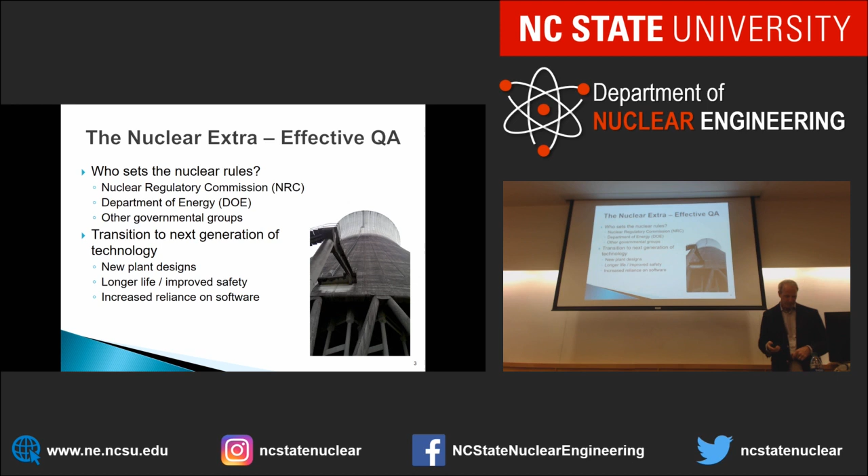So what's required in quality assurance? Facilities that are regulated by the NRC, we got about 96 right now. I think last time I checked, there were a little over 100 a few years ago. About 20% of the electricity in the U.S. comes from nuclear power. That varies depending on where you're at in the world. You go to France, more like 80%. Other countries, very little. But we're about 20%, so we have a mix.

With that, 31 research and test reactors, including right here at NC State. You'll see that there's other activities, though, that the NRC regulates besides the big ones, which are the power plants and research and test reactors. They do a lot of work in the fuel transportation area, spent fuel, new fuel, that type of thing. They also work in areas like sources for things like radiography, different types of manufacturing type areas. And then there's a large component that goes into medical devices, if it's a nuclear type of medical device, brachytherapy type sources, things like that. Sometimes that's a shared responsibility with a state, so a lot of the states do the health type work.

The area I worked in when I was at the NRC, I worked on the new plant area, and we handled the supply chain aspects for the new plants and the new plant licensing primarily. So that's the area I know most about, because that's just where I worked there. There's also new plants coming on board. We have 2 new plants in Georgia. The Vogtle plants are coming on board. They're in the middle of construction right now, about 80% complete. They're down close to Augusta, Georgia.

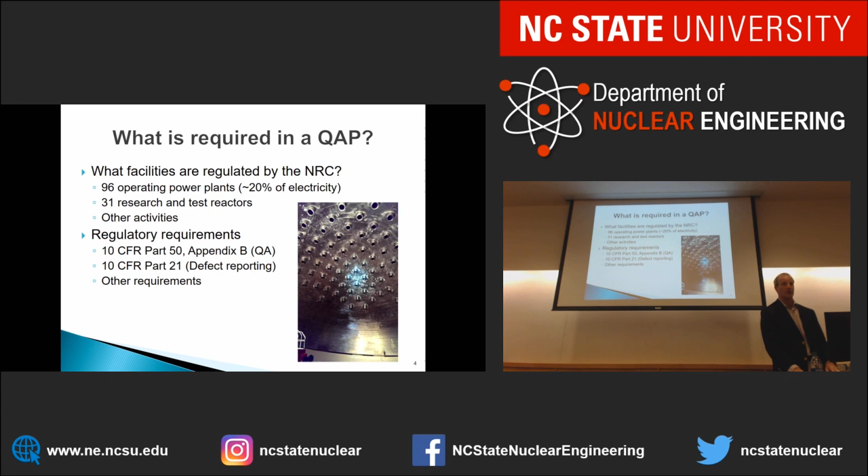So these would be the 18 criteria that make up the nuclear extra, or you might call it the 18 criteria that are printed on this page in regulatory language, or what we call requirements in ASME NQA-1, the basic requirements. This is the 2017 version; the latest one's been published. They do one about every 2 years. This particular version has the basic requirements of these 18. It's probably that little part in the front, very little as far as the written.

And then there's more requirements that say, hey, if you're doing certain things, these are the things you should do. That's a little bigger part. And then all the stuff in the back is guidance, like these are things you could do. There might be good practices, the best way to do it, that kind of thing. So this has a little more information in it. But the 18 criteria are the same. They matched them up to make it easy.

And to give you an idea of some of the things that go into this nuclear extra, that might make a company that does nuclear work different than a company that just does work for the medical industry or general type work for you as a customer. Organization. We have a very structured organization. One of the big themes within that is independence. If one person does work, we have another person that's independent do checking of that work. That's a common theme.

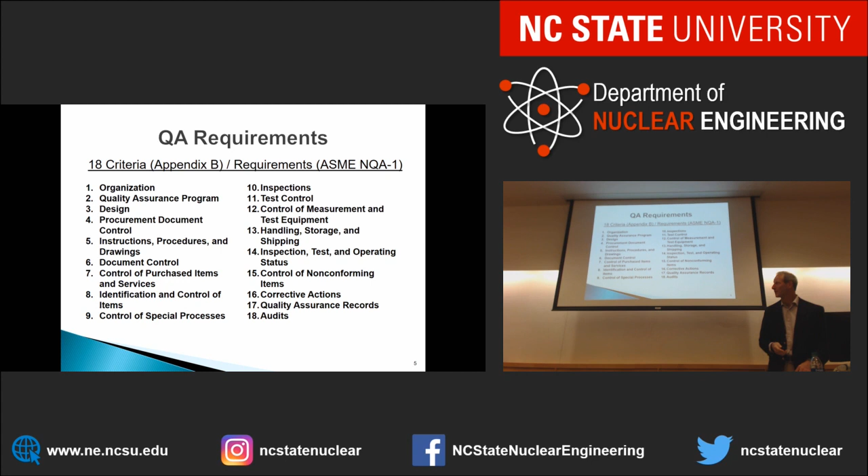Just out of curiosity, has anybody seen these before? A couple people? People who worked in quality assurance probably know it, or do audits. They know that because they have to know what it specifically says.

Let's talk about a couple regulatory concepts. The first one I want to talk about is this top line, basic components are safety related. If you ever heard of something being most critical in a nuclear plant, it's called safety related. The technical term might be it's a basic component, it's a pump, it's a valve that is very critical to the operation of our plant.

Well, most people in a plant probably couldn't tell you how it became safety related. They just know it is safety related. A pump or a valve or a system has been designated as safety related. Well, this is why it's safety related in a nuclear plant, because it's related to one of these three things.

One, it's something to do with the integrity of the reactor coolant pressure boundary. So in a plant, you're circulating coolant, and there's a pressure boundary that typically goes with that. So the integrity of that boundary, so we're not spilling that coolant. That's the first one. Second one is we want to be able to shut down the plant and maintain it in a safe shutdown situation.

That's the second one. And then the third one is, in certain cases, you might have accidents or other events that might cause you to release something into the atmosphere, to the ground, or that might affect your local populace or your employees. So we want to prevent that off-site exposure. So the people at the high-level design have to be really aware of this, because they designate systems as being most critical, safety related, because of these three areas.

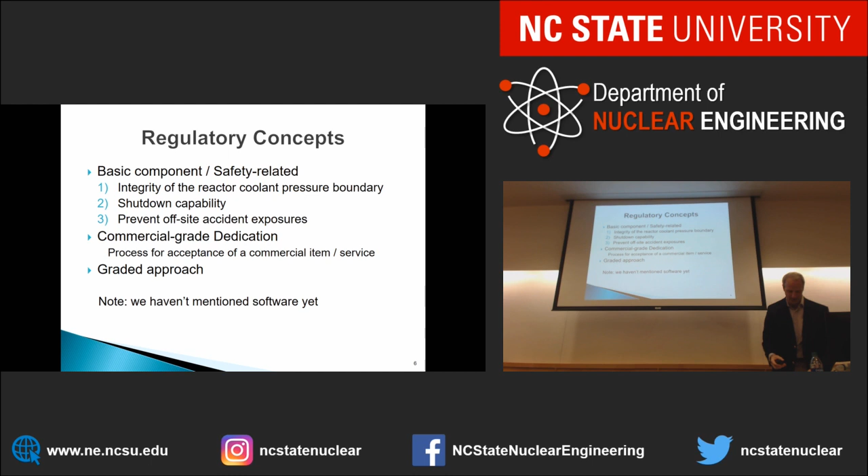Okay, so to bring this all together, there's a flow down of quality assurance requirements. We start from the government, it goes to a licensee. So a licensee might be a nuclear power plant. It might be NC State because you have a test reactor. And then it even goes to supply chain because you've got to buy your pieces or services from there. So we talked about how Appendix B from the quality requirements gives the 18 criteria.

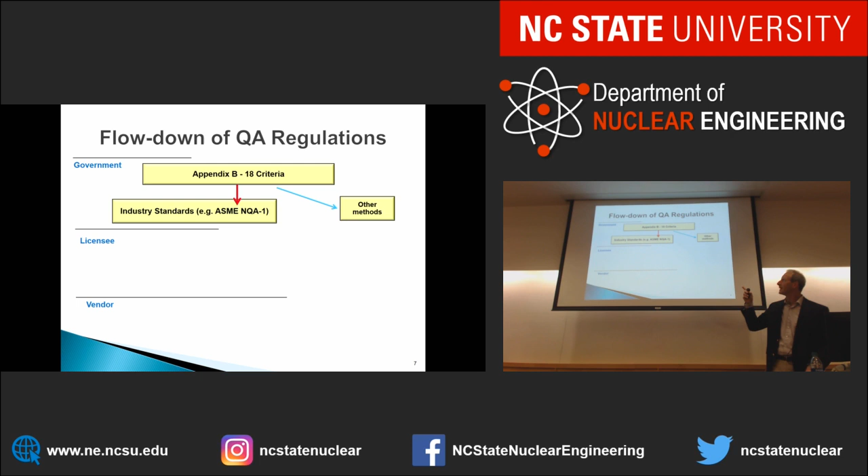Typically, you go through an industry standard like this, and you say to your licensee, via their license, which is part of the NRC licensed activity, and I think there are actually some NRC folks here today talking about licensing. So that license exists with those organizations that are allowed to operate within the nuclear industry from the NRC. Part of that's the quality assurance program, the QAP. And that licensee is going to do that grading and manage the quality program, and will determine what's safety related based on how they operate and what's not.

Some things might be just purely commercial, non-safety, but then there's this one in the middle that's augmented quality. You might hear that term. That's something that has additional quality requirements, maybe like Three Mile Island requirements or something else that's really important, but it's not safety related, because safety related is those 3 things. So the licensee then wants to buy things from the supply chain, and they would issue a purchase order, the red line over there to the left, and the quality assurance requirements would be put down to the vendor, who has another quality assurance program that meets nuclear requirements, and they can buy things directly from the vendor fairly easily once the vendor has the nuclear quality assurance program.

If they don't, then you've got to do something called dedication, and there's 4 methods for doing that, which I really won't go into, but you can get things that were commercial and deem them equivalent to nuclear produced things by using dedication. Or if it's maybe not safety related, you just do other things, and there might be other requirements that go with it. But that's kind of how it flows down into the industry.

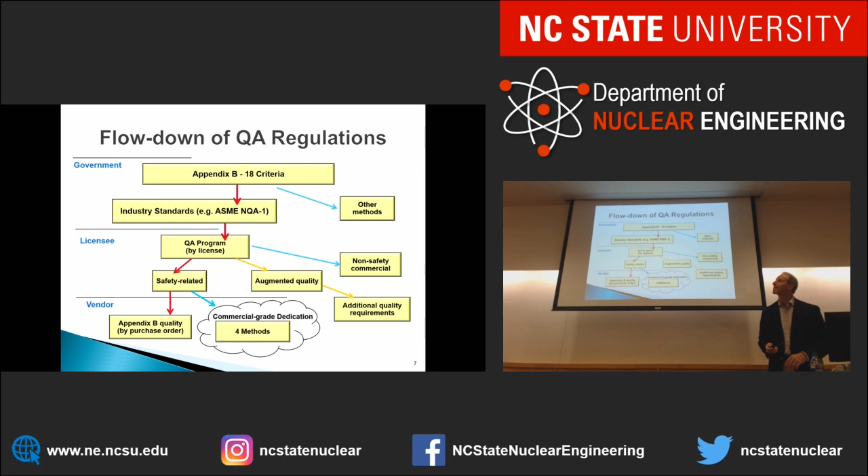So now let's take a step back and talk about computer programs or software and how we apply these requirements to software. Well, from a regulator standpoint, the regulatory concern is, does it affect the safety of your plant, which is those 3 things we talked about? Or is it part of your license that you said you've got to do something? So, for instance, let's say you're operating a nuclear plant and you have a valve, and a valve is a big chunk of metal, and you can open it and close it, and maybe there's a controller that does that. Well, the whole valve, even though it's part of a safety-related system, may not be safety-related.

For instance, maybe the valve just has to hold the pressure and not leak the fluid that's in it. Well, then maybe the pressure retaining part of it is safety-related. The fact that it opens and closes and the flow rates, or that it does it at a certain speed, may not be. It may be important, but it's not safety-related. So it's very important that you focus on what the part or the system or the component is, and how it affects safety. Usually the highest safety, from a software perspective, has to do with things that are embedded in safety systems. So if you have a sensor or a controller that has software embedded in it that makes it operate, and the operation is safety related, that's going to be the highest level of safety.

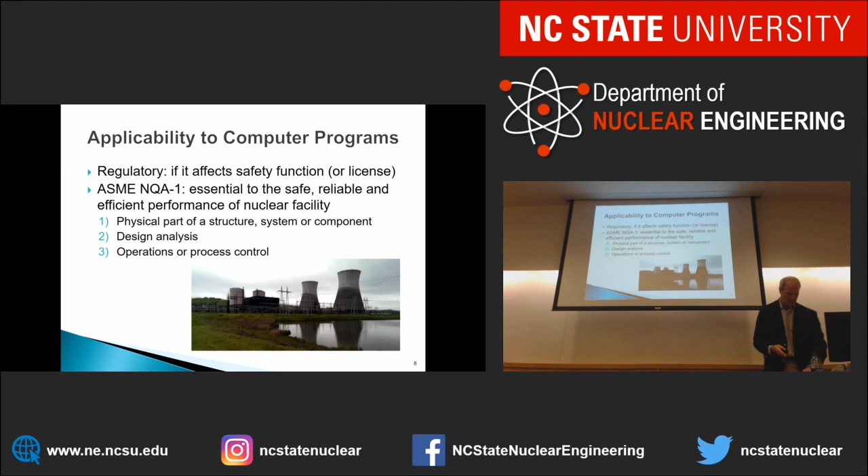Some software considerations. One thing is that software is a little different than a component. If you're a manufacturer, you're making something, and you're going to check it, you're going to test it, and you're going to ship it. If you're a software producer, you might do development, you're going to do some sort of testing, and you're going to send it out. There could be different ways that you send it out.

It's a little bit different because you've got more of a development side, and as we all know, software is usually not perfect when we get it, whereas components hopefully are as close to perfect as we can get them, especially in nuclear. So there is a little bit of a difference. NQA1 is more oriented to the components, but there are software elements that we're going to put in there.

And to get those elements, you really have to go to a certain subpart, that's what SP is, in NQA1 called subpart 2.7, and that gives you your software controls. It's probably about 20 pages long. So 20 pages tells you how you do software, whether that's developing software or using software. Could be either one.

It's not all inclusive though. NQA1 won't go into some areas like malicious intent, cybersecurity, those types of things. You're not going to find them in here. Important, you've got to do them, but they're just not in that standard. So it gives you a lot more information on how to do software, and that's where you would find it. Another area, if you were interested, dedication has another subpart, 2.14. Those would probably be the two areas that are more directly applied to software.

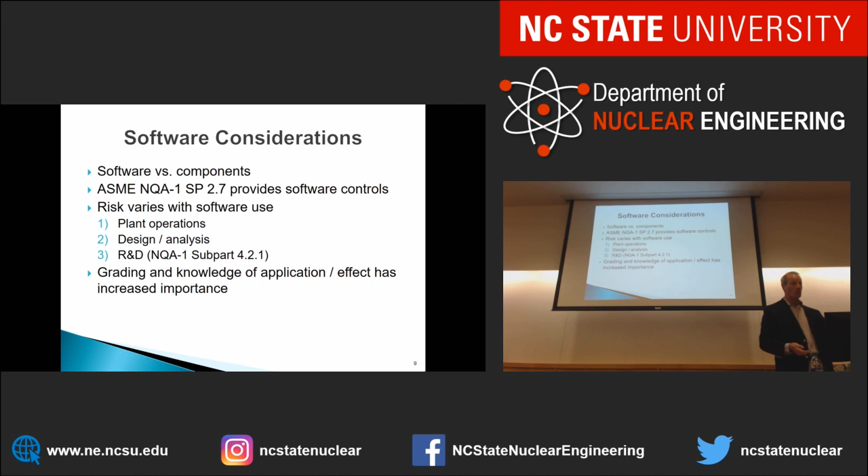So let's take a look at the worst case and give you an idea of how much rigor would have to go into your instrumentation and control system producer. Well, you have something called a life cycle, which is the software development cycle, how you go through, develop, test, that type of thing. There are life cycle documents that you would have to conform with. You've probably heard of IEEE standards. IEEE has a couple that would apply to the overall life cycle of developing software.

The NRC takes an industry standard like IEEE and puts their blessing on it through what's called a reg guide, or an RG. And they say this reg guide endorses the IEEE standard for software life cycle activities. And with that, there might be things you need to produce like a software management plan, a project management plan. So that's kind of the overall umbrella, but it gets a lot worse than that. Well, if you have a life cycle for I&C, you might have all these different phases you go through in your software.

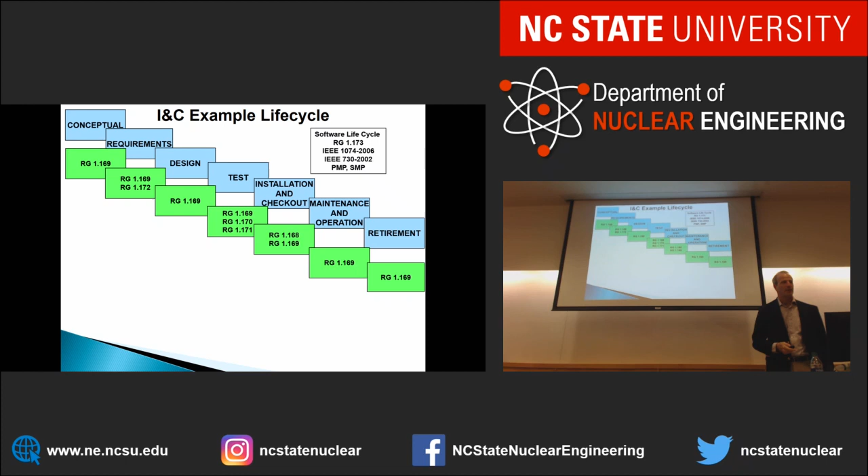From conceptual through design, through testing. You check it out, you retire it. So there's different phases potentially. And then there's reg guides for all those phases. And then there's IEEE standards for all those reg guides. And then there's documents that come out from everywhere, from requirement specifications, development, design documentation, verification plans, and reports on

down. So to give you an idea, if you're an I&C very high risk type of software, there's a lot that goes into it. And you probably have a very large dedicated staff to do this. So let's not talk about that because that's way too complex. Let's talk about a use example. And a use example would be something like maybe you do electrical sequencing in your plant from your emergency diesel generators. They come up when they come up, and you have to reload your system by making sure you don't overload your generator by sequencing on your various systems. So it might be something as simple as that.

So how would this work? Well, there's two areas that you would focus on. One would be the acquisition, how you get that software, and then what you do with the software once you get it. Those are the two main areas. Your software program, your quality assurance program is going to control all those software activities. Again, you're going to focus on what is the safety effect of this, and then you're going to decide you're going to buy this software because you're probably not going to produce it.

So you're going to buy it, and you're going to buy it from either a single source or multiple sources, and you'll have to figure out if that software is going to work with other types of software. You're going to have to figure out how you're going to control that, and you might go through a dedication type of process with that. There'll be quite a coordinated effort that would go into the acquisition between your procurement people, your engineering staff, your quality assurance people, to make sure you're meeting your safety requirements when you're buying that, and the supplier can supply what you want, and it will properly function for you. So that's part of the acceptability: once you go buy it, you got to make sure it really can do what you want if it's important.

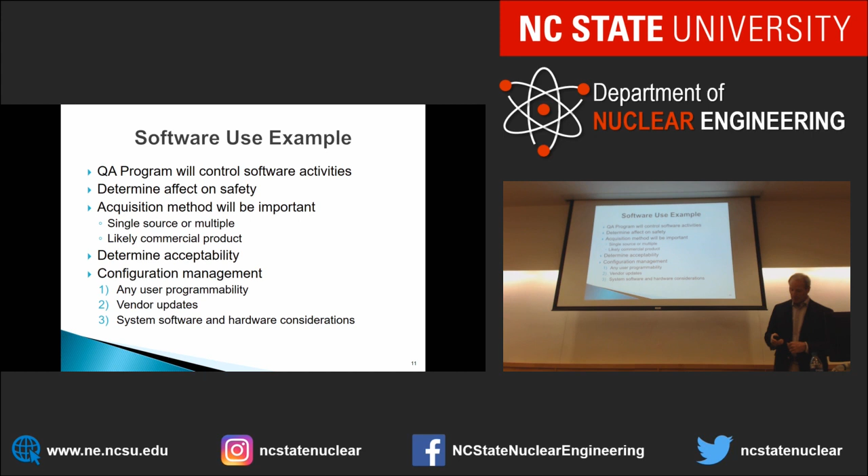Another example would be you're a developer. So there'd be more aspects of your quality assurance that would get added in if you were a developer. Again, NQA-1 tells you what to do, but now you're going to do things much more in depth, and there's going to be a lot more of them because you're going to do a lot more in the software development. Again, the QA program will define things. You're going to have to focus on an area: either if you're going to make software for a user, what we call user limitations and specifications, or if it's going to go in a product, like a controller of some sort, it would have to be part of the design of that.

So you have to really define what those specifications are, and you would do a lot of grading in this as the developer organization. But acquisition is still probably going to be important because you're probably going to end up buying things like software tools, system software. You might have things like drivers that go with it. There might be other things that you need to make the software operate, even though you develop a certain part of it. So you're still going to probably have to do acquisition, and you're going to develop this and test it under a lifecycle, which I'll show you an example in the next slide.

And your configuration management will be much more robust to the point of you will identify all the configuration items, specific things that you're going to control. You're going to very tightly control how you change things, and you're going to do statusing when you go through that, in addition to considering your tools, your system software, and the hardware that goes with it. So it's going to be more robust.

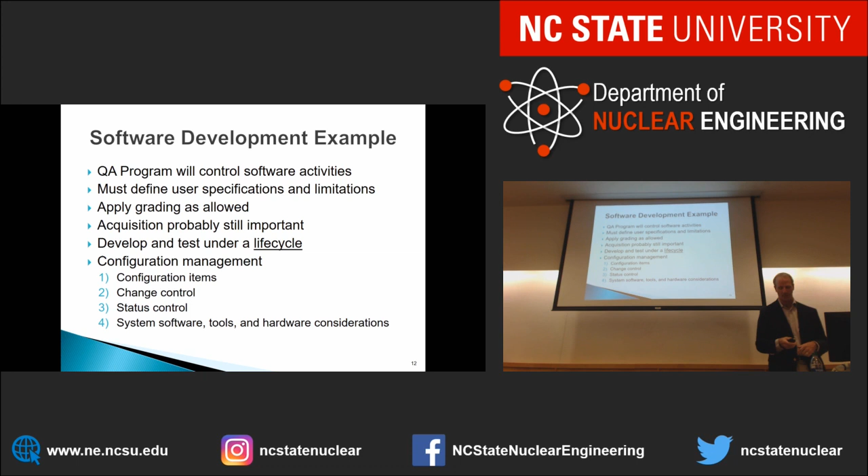Lifecycle, there's a lot of leeway within developing organizations, what they use for a life cycle. It could be a waterfall, which is kind of what NQA-1 does, which is what I showed you a few minutes ago with all the colored blocks in it. But it could be spiral or other types of development methodologies. It could be an agile methodology, which a lot of software companies are using. All that's allowed, but the main key is you have to have key elements as part of the quality assurance program, and I'm kind of showing you some of them here.

One, you're going to have planning documents that say who does what, who's responsible for what, when's it supposed to occur, those kinds of things. You're going to have specific requirements for the software, which will go through the design, and then that's going to drive your testing so that you can go back and make sure you met your requirements. And then we have something called verification and validation, which is verifying that either a phase has been satisfied or the end product has been satisfied. And as I mentioned, independence and approvals go with that.

One of the biggest areas, producing that user documentation, because if it's for a user, you want to let them know what the limits of what you put into your software. It could be very different. The limits for the nuclear application may be different than what the software can do overall. You maybe only have one module, for instance, or one type of calculation that the software will do, and that's the nuclear part, but the software does 99 other things. Well, you need to make that clear to the user because they can only apply it for a safety-related activity if it's designated as such, and that might be one little part of it.

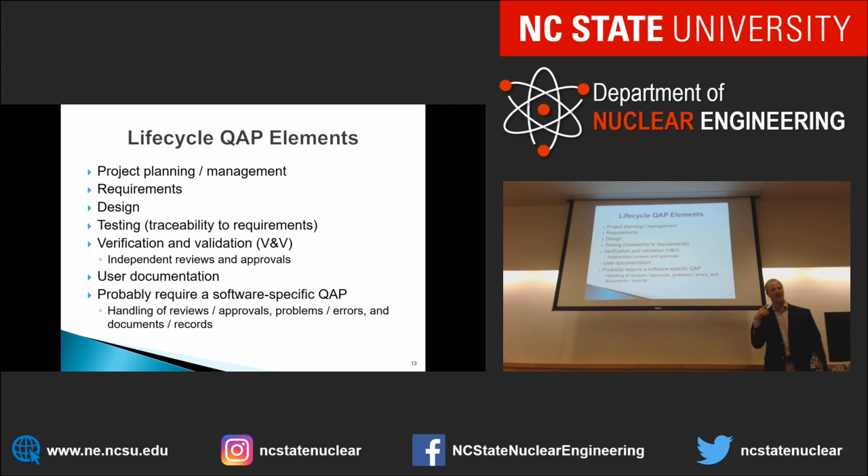So what I tried to take was a few minutes to give you details, and nobody's head hit the ground, which is good, on the software, but kind of flow down from what's the regulatory requirement down through a quality assurance program, which would exist at all the licensees or plants or organizations that are blessed by the NRC to operate, and then how that might go to a supply chain, and specifically for software, what's some of the extra stuff that you need to do to give you a feel for it. So that's kind of what I covered. There's a lot of different areas in there. So if people have questions, I'm happy to take them now. Yes, sir?

One of the things that might be relevant to these guys when they go out that you didn't cover is if you're doing safety analysis, all of these requirements go on whatever you got installed on your desktop. It all hits it if you're going to do any kind of safety analysis for your plant. That's correct. That's the way it is, for real.

Yeah, it's safety affecting. So it could be you're affecting an application, a basis for license, or the actual pieces that go in the plant that do those three things. So there's many areas that go into safety. The NRC spends a lot of time making sure safety is well maintained within the industry, even though it's a little part of a whole plant's operation.

Other ones? Yes, ma'am.

Safety regulations are generally aimed at preventing reactor core meltdown, right? And for these new type reactors, molten salt reactors, the reactor core is already melted. So in your opinion, how will the safety regulations change? Okay, so the question for anybody online that couldn't hear it was, how do the regulations change when you focus on safety and the core melt, for instance, with a new generation like molten salt that might have a different type of core, and how would that be applied? Is that the question? Okay.